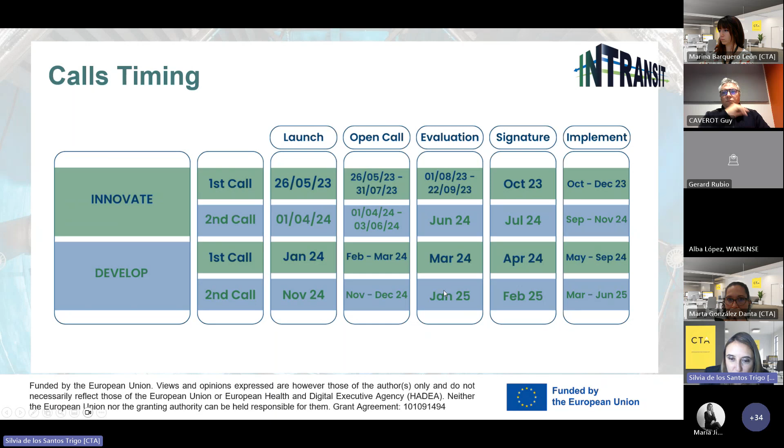The winners will be able to implement them between March and June of next year. That is only for you to have in mind if you are thinking of preparing some proposals.

This is the overall information about what we have done in this project. We are going to distribute more than 3 million euros between the SMEs in Europe of these 4 sectors through the Innovate services and through the Develop project. We expect to have at least 160 beneficiaries between the 2 bonuses, and more than 200 between the incubations, workshops, webinars, and the final event that will be here.

The Innovate Call is an advisory service to support companies to be more effective in different topics. Of course, we're going to support you in new circular business and to improve your projects.

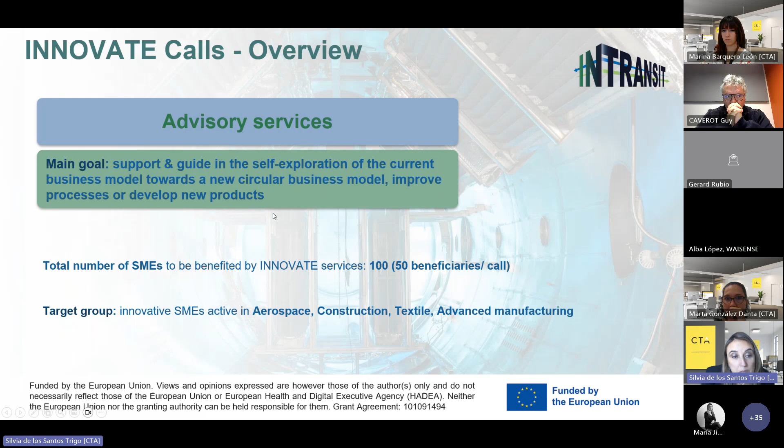The Innovate advantage that you will receive for being part of this bonus is, of course, the advisor for individual experts. You will be able to obtain the maximum benefit, the maximum impact of the Intransit project, because we will have a lot of visibility through Europe.

Of course, you will be part of the Intransit community, where you can find very good companies and potential collaborations in your innovations. And you will have a very direct benefit: if you are a beneficiary of Innovate, you will be able to obtain extra bonus in the evaluation of your future Develop proposal, and you will be able to be at the top of the ranking to be financed, because we have a lot of companies trying to receive this bonus, and there is strong competition to win.

For the second Innovate call, this is an overview of the Innovate call, only for you to know exactly the timing. We will have to finalize between September, October, and the beginning of November.

The Develop call is the mechanism that we have designed to provide you some funding to develop your innovations, to be able to develop new products, new prototypes, to make some market testing to facilitate the integration of your innovations in your business. As I said, we will be able to support projects in the lump sum financing way.

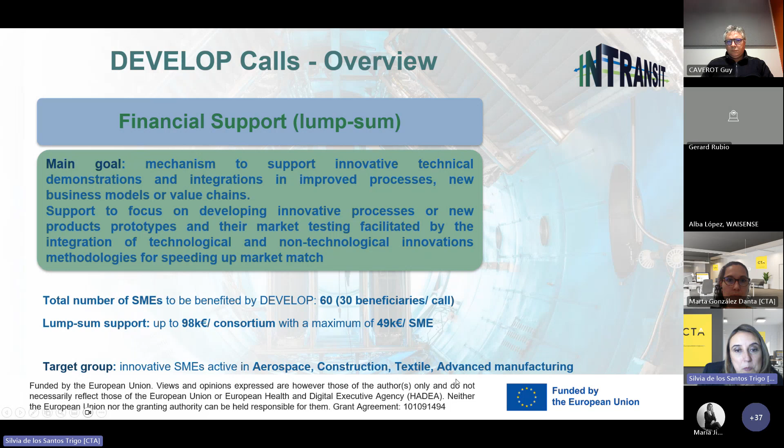The target group for this call are the SMEs in the aerospace, construction, textile, and advanced manufacturing sectors. And this is the timetable.

As I said, we expect to open in November. At mid-January, early January, we will finalize our call. The winners will be able to start implementing the project in March.

And that's all from my side. This is the presentation of the project, of the projects. I'm going to stop sharing the presentation.

I have to say that we are very happy to have here our partner, Instituto Jules Verne, and Guy Caverot is going to present the tech development that they have, especially in Industry 5.0, which is the topic of this session. Guy, what do you want?

Hello, is it okay for the presentation? I just put my... Maybe, Guy, if you can put it full screen, it's much better. Is it okay? Full screen? Perfect, thank you.

Okay, so I am Guy Caverot. I am in charge of technology transfer at Research Institute Jules Verne in France, in the west of France. This research institute is dedicated to industry and manufacturing. In this presentation, I propose to give you a practical view of the Industry 5.0 project through the presentation of concrete examples.

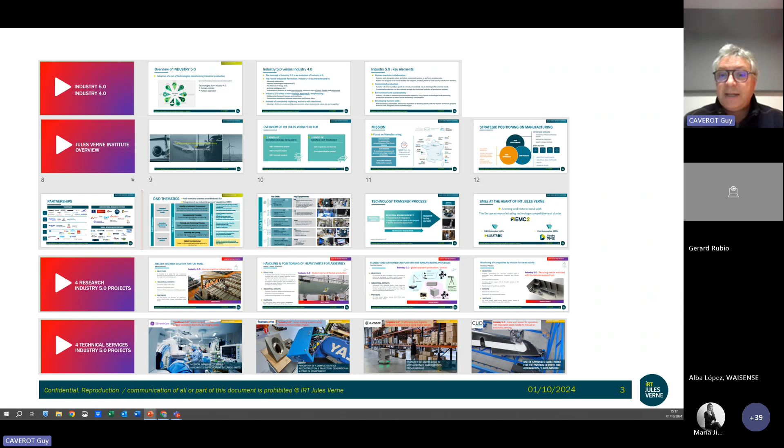I have divided this presentation into 4 parts. The first part, during 2 minutes, will briefly describe the concept of Industry 5.0. After that, I will describe our institute in a few minutes, and the next part will be the description of real industrial projects in different fields of application: shipbuilding, aeronautics, control, medical, and so on.

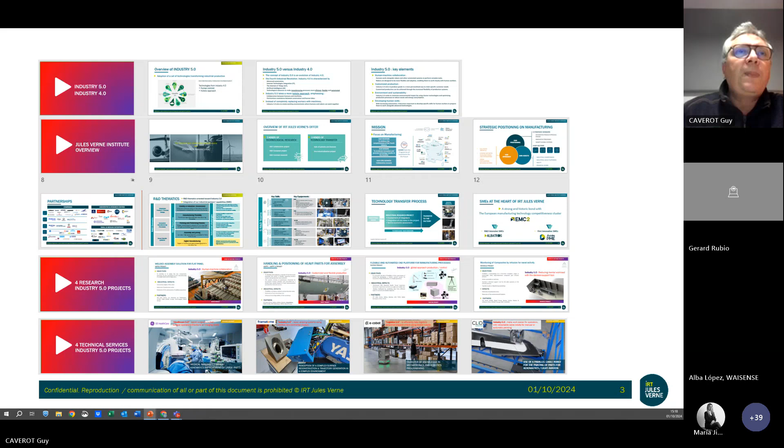So the first part is a brief description of the concept of Industry 5.0 and Industry 4.0. The concept of Industry 4.0 is a set of technologies to transform industrial production. In this Industry 4.0, we integrate different technologies, for example augmented reality, big data and analytics, and simulation, and so on.

And the origin of this description of the concept is a huge company. The name is Boston Consulting Group.

After this first Industry 4.0, with the main topics around manufacturing in order to be more efficient, flexible, and so on, the concept of Industry 5.0 is an evolution in which we try to have a more holistic approach in order to integrate the collaboration between humans and machines. We try to have a coexistence between automation and human labor, and we integrate in the project the different impacts: social impact, environmental impact, and economical impact too.

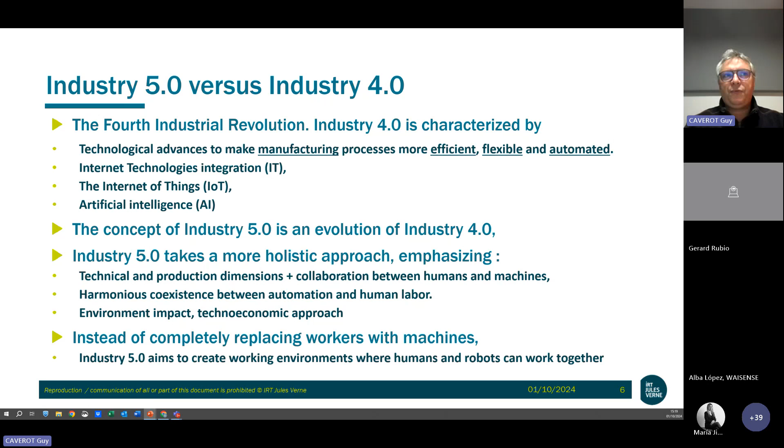So in this kind of industry, as we'll see in these different examples, we have a global approach with human in the center of the project. And the key element around this concept of Industry 5.0 is human-machine collaboration.

We will see examples in robotics, customized production in order to have a more personalized way to meet specific customer needs, environmental and sustainability in the project, and we integrate in our institute the development of human skills in the project in order to enhance the skills and know-how of the different people involved in the project.

So the next parts of my presentation, during 4 minutes, will be a description of our institute in the field of Industry 5.0. The main activity of our institute is Industrial and Collaborative Research Center dedicated to manufacturing in aerospace, shipbuilding, energy, and so on.

We propose different projects, European and French collaborative projects. We propose different research services, and we propose transfer of technology in terms of sales of patents and a project in order to transfer the results of the project.

The main mission of this kind of research center in France is to accelerate innovation and promote technology transfer to the factories. And we are in a network. The name of this network is the French Institutes of Technology, in which there are Research Institutes and Energy Transition Institutes. The core business of these different institutes is collaborative research.

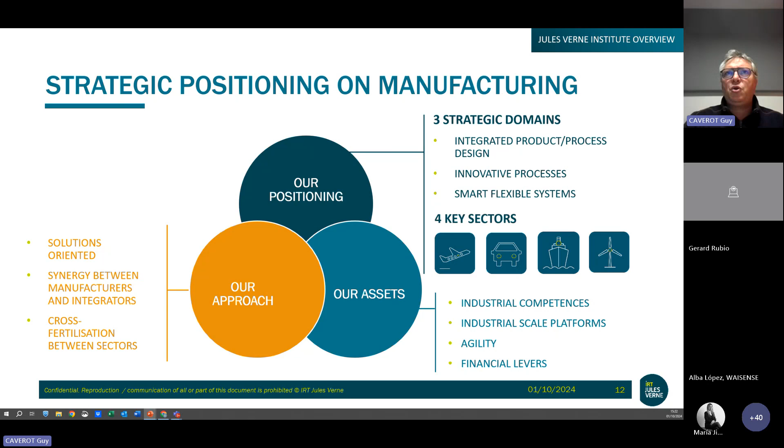And we are around 150 people in our institute now, with industrial competencies, industrial platforms, and capabilities of project management too. So you can see the different figures of our institute.

The average of activity is around 25-30 million euros of activities per year, and the perspective is around 40 million.

And in the field of Industry 5.0, we propose different R&D thematics around flexibility in manufacturing, in the process, in the field of assembly and joining of large parts, and in digital manufacturing.

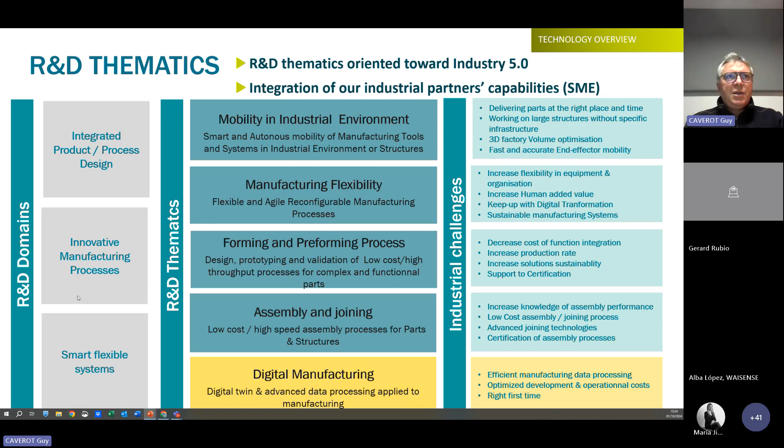And for each different thematic, we address real challenges in industry in order to enhance the quality and performance of products in industry. The three main R&D activities are integrated product and process design, innovative manufacturing processes, and flexible systems.

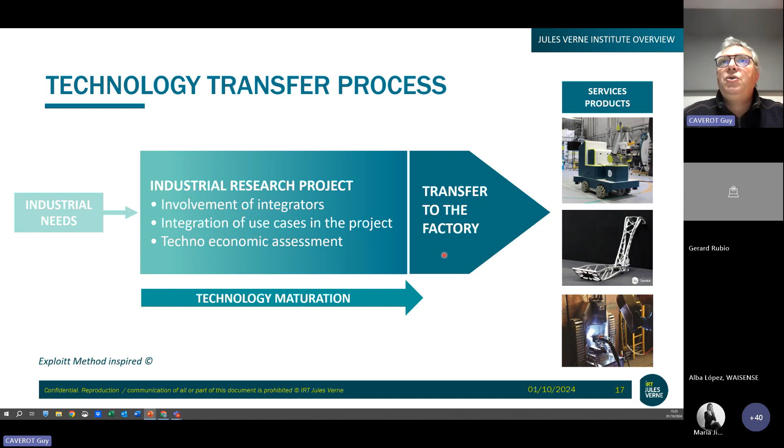So after this first view in 9 minutes of our activity and the concept of Industry 5.0, I will present during 10 minutes 8 different research projects, concrete research projects in the field of Industry 5.0.

The first project is ASPEN, a project in welding with mobile robots. You can see the mobile robots here. We propose this solution in partnership with end users, the first being Chantiers de l'Atlantique, a French shipbuilder, and another in the field of submarine, nuclear submarine production.

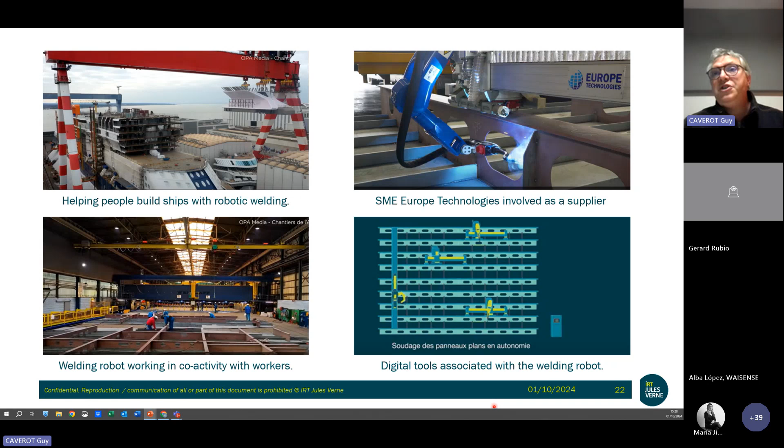You can see here the welding robots working in coactivity with the worker. There is real coactivity with the worker, and we need to supervise this activity. We used an IT model with digital tools associated with the welding robots.

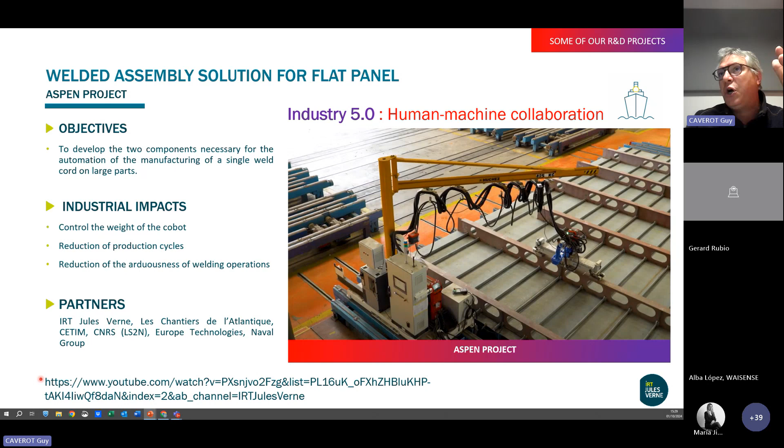This is the first example, and here there is the link to the video of the presentation of this project, showing the different activities of the end user and researchers of the institute in this project.

The second example is in the field of handling and positioning of heavy parts for assembly in aeronautics. The name of this project is HAPPY. In terms of specification of Industry 5.0, we propose a customized and flexible solution for the production of airplanes.

We are working on the development of a system of robots in order to enhance the quality of assembly of different parts of the plane. The system consists of robot positioners, which you can see here, mounted on automated guided vehicles. This system is controlled and in closed loop with a visual system in order to control the global system.

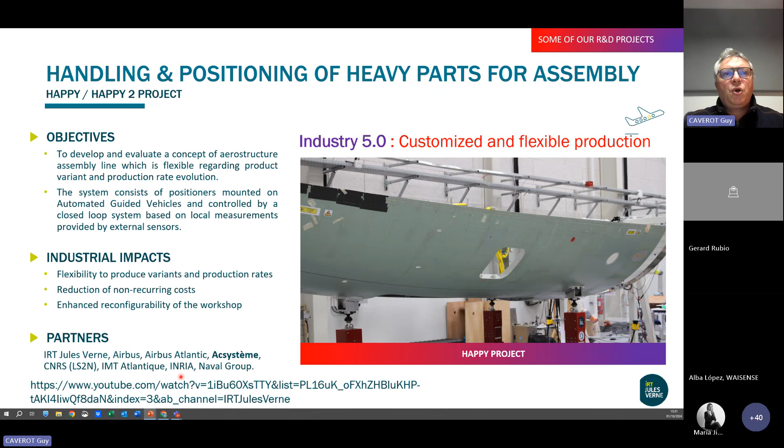The industrial impact of this project is mainly the flexible solution and the reduction of cost, with the reduction of the line production surface, and we try to enhance the reconfiguration of the workshop at Airbus. There are different partners in this project: Airbus company and Airbus Atlantic, a company in the field of automation, and different companies in research activity in visual survey.

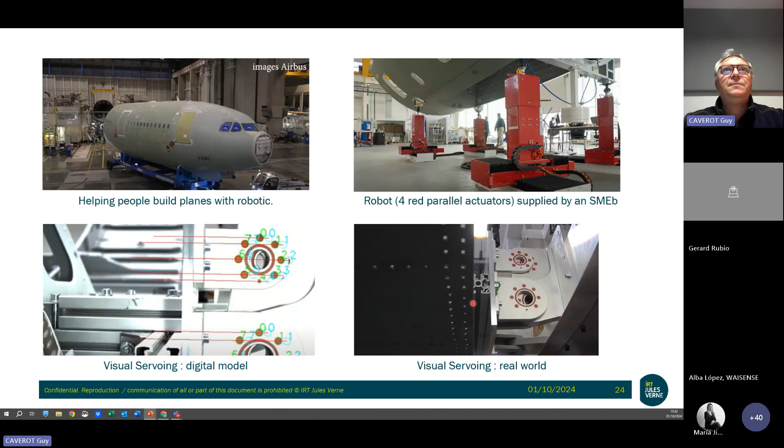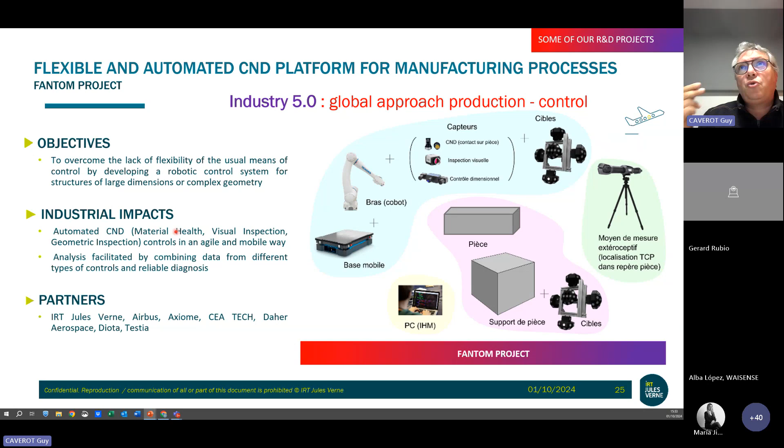The second part is the control. After that, we use a measurement system and supervision. In this kind of product, we integrate automated control of the quality of material. We can propose visual inspection or geometric inspection, and during production we propose an analysis of the different parameters in order to optimize the production. So this part is the control of the project.

And in the same time we have a project with the main topic being this one: in this project, we try to control composite infusion in naval activity.

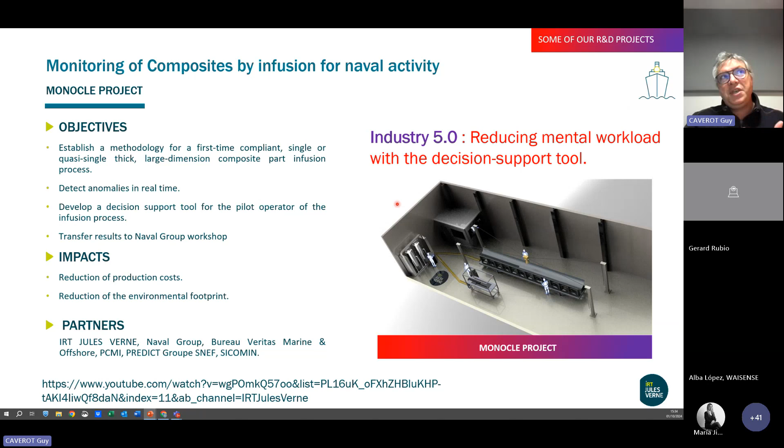We try to optimize the production and the cost of production, and the very important point in terms of human impact is that in this project we propose an interface in order to reduce the mental workload with tools of decision support. So this project is not only in the technical field of process optimization in composite, but we integrate another part in the field of human optimization activity in production.

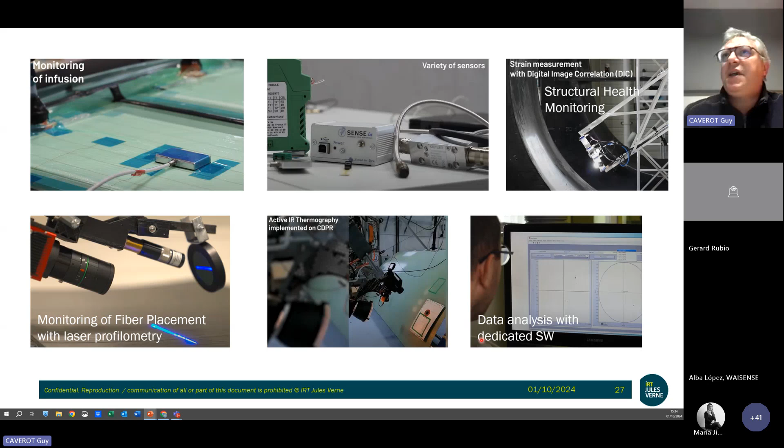And we propose different monitoring for this project. For example, for the infusion, we propose different sensors. You can see here the system with a laser measurement, and another system of measurement. We try to propose an interface in order to facilitate the work of the operator in these two projects.

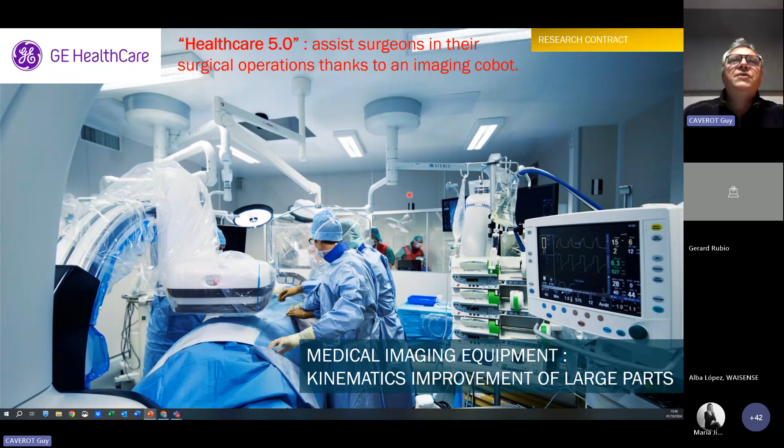The next project is in the nuclear application, a sort of industry application. In this project, we integrate environmental impact in order to repair the parts in a nuclear application system. In this kind of project, we integrate different technology.

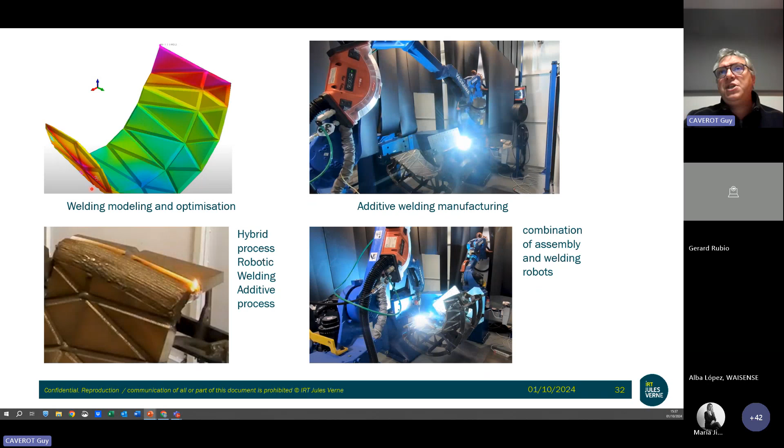For example, you can see a hybrid technology with welding technology here, with robotic welding, and in this part with 3D welding. We use different robot solutions, and we integrate modeling and optimization with an IT solution in this repair activity, with the company Framatome in France.

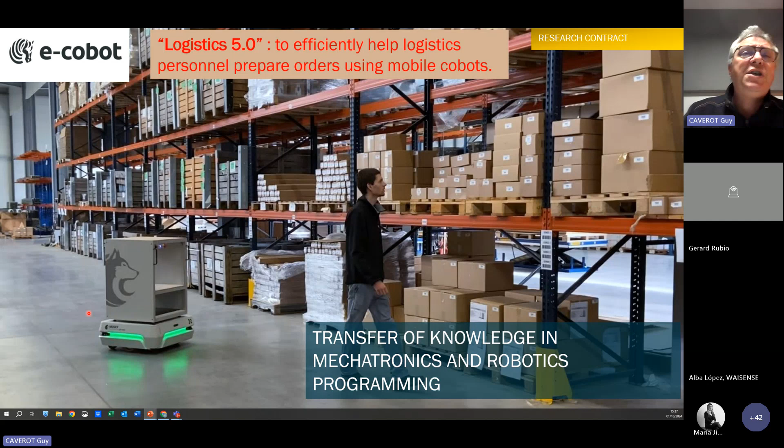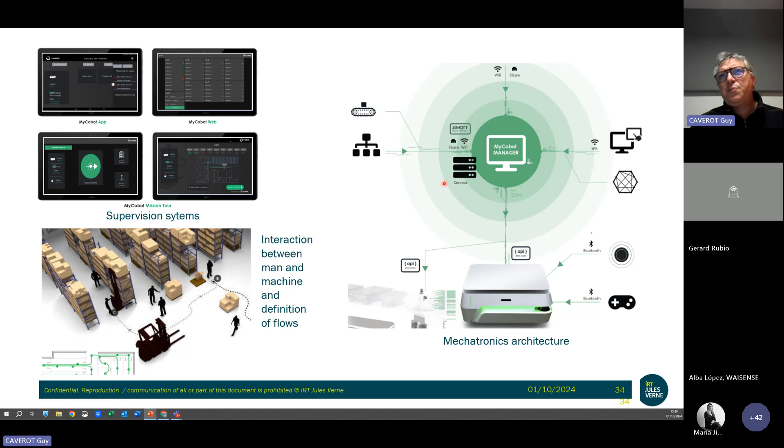The next project is in cobotics, in Logistics 5.0. In this logistics project, we try to propose a solution in which we integrate some knowledge in supervision, some simulation of people in interaction with machines, and we worked with these partners in the field of architecture of the system.

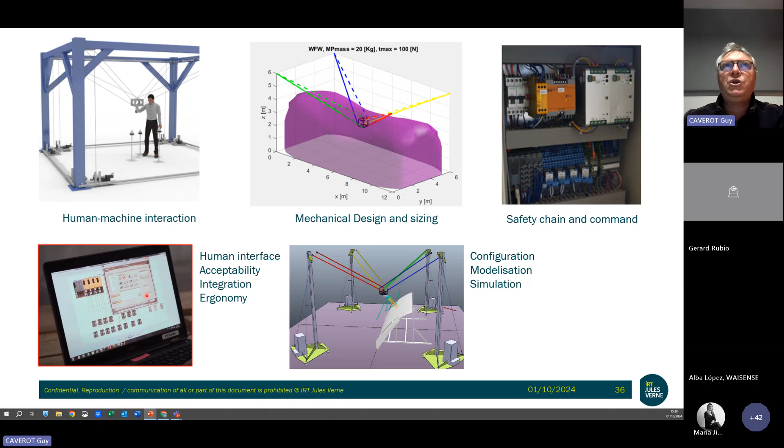The last example is in the field of cable robots for manual and automatic painting. In this project, with an integrator, the company SNEF and CLID Systemes, we integrate robots in an area where there are operators with a manual painting solution, and we integrate a mobile solution with robots using a parallel cable. We work on human interaction, simulation, and after that propose a solution with this kind of cable robot for this kind of painting application in aeronautics activity.

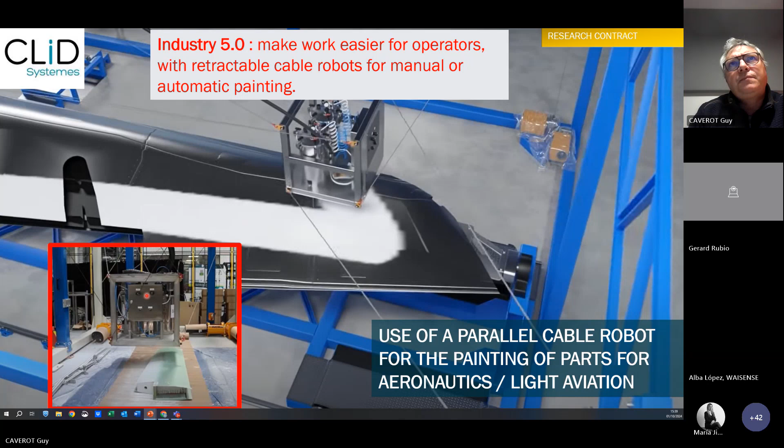So to conclude, in this presentation I presented industrial and R&D projects in advanced technology, metal and composite manufacturing, IT supervision, in different fields of application: aeronautics, shipbuilding, naval, logistics, energy, and so on.

I tried to show a global and human approach of Industry 5.0 with interaction between people and machines, for example with welding robots, in logistics, in surgery, describing flexibility of production in assembly activity, in painting with parallel robots, and describing improvement of technologies with an economical analysis, for example in nuclear and production applications.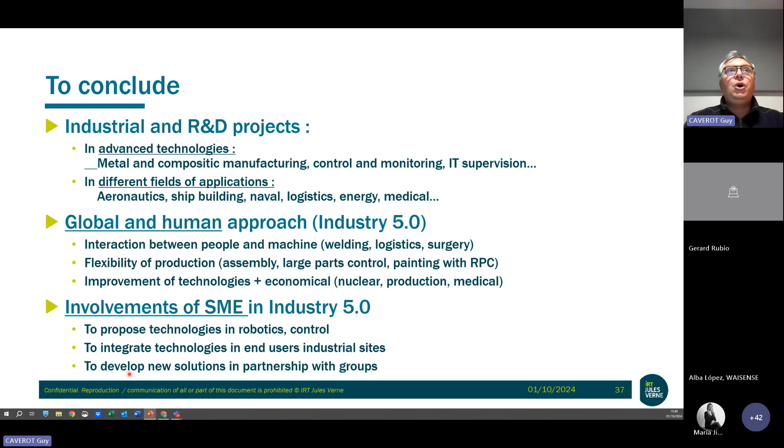The last point in this presentation is the fact that there are a lot of small and medium enterprises involved in these projects, in order to propose technology in robotics, for example with Euro Technology, and to integrate end users and industrial sites with this technology. In our institute, we develop new solutions in partnership with groups, with the involvement of these SMEs, to produce a solution and bring it to the market.

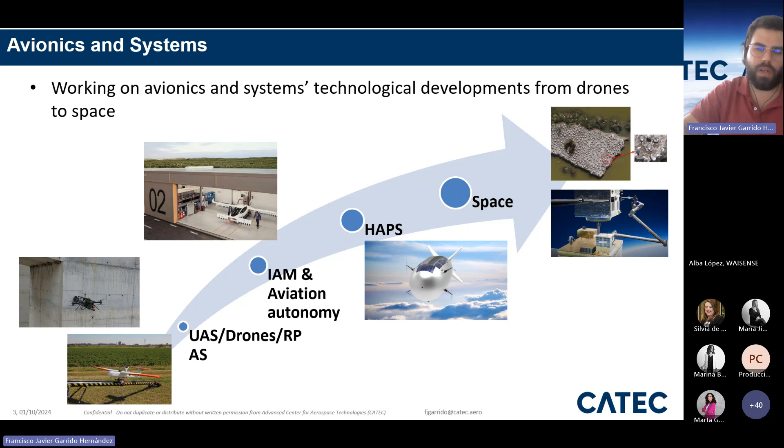Regarding avionics and systems, my department, what do we do? We work with all the avionics and systems regarding aeronautics that you can imagine. So we fly and we design and develop aircraft, UAS, drones and RPAS, and into space, and through innovative air mobility, and also aviation autonomy, and also with high altitude pseudo satellite aircraft, these aircraft that are expected to fly in the stratosphere, in the middle way between an aircraft and a satellite.

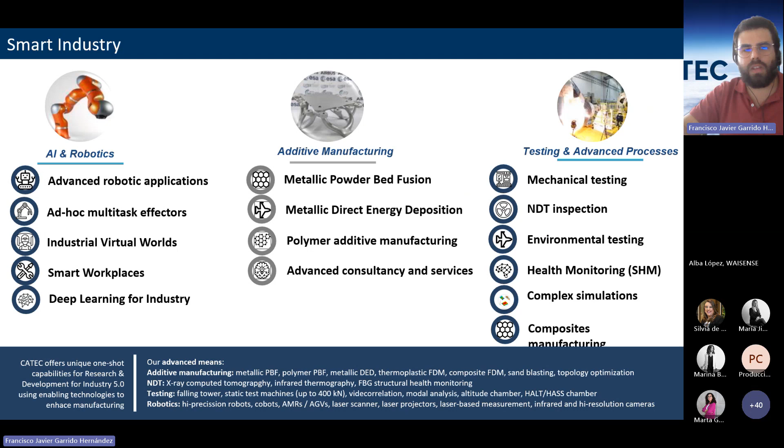Then regarding the Smart Industry department, it is not my unit, but just to present it, they have 3 different units: the artificial intelligence and robotics unit, additive manufacturing, and testing and advanced processes unit.

And finally the new Energy department, as I said we have already opened, will be focusing on hybrid energy platforms with hydrogen fuel cells, batteries and ultracapacitors together with advanced semiconductors, optimal power supply through artificial intelligence, and advanced testing of power supply units.

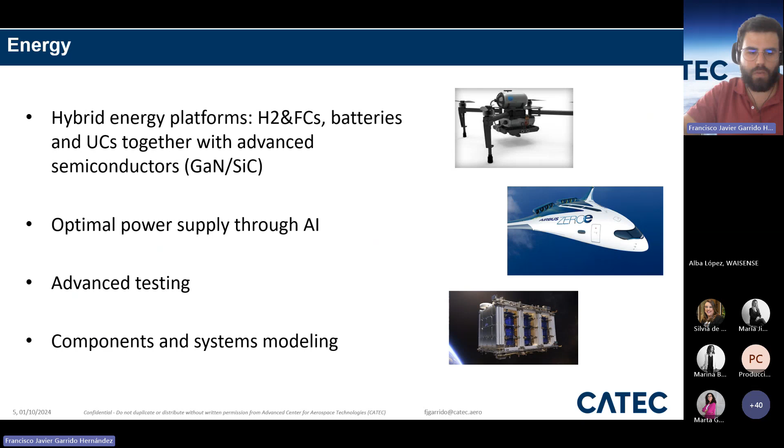What are my intentions with this presentation? I want to present to you, as my colleague did before, 3 different projects regarding avionics and system units, so UAVs, drones, and how we apply these drones to the construction, inspection, and maintenance sector.

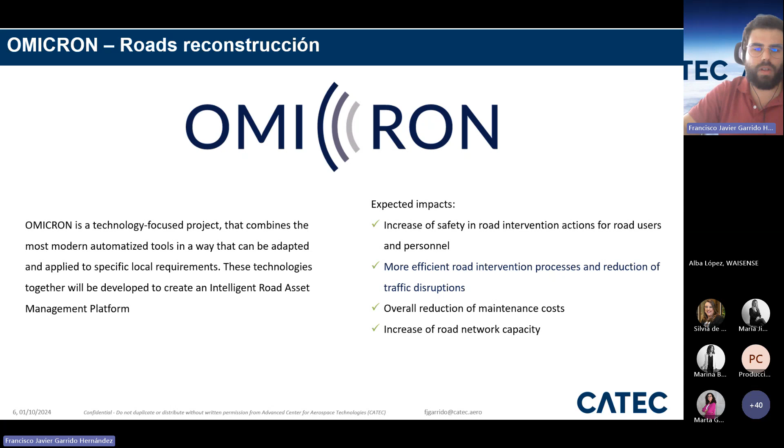The first project is Omicron, which you can see in this slide. It is a technology-focused project that combines the most modern automatized tools in a way that can be adapted and applied to a specific local requirement. With this combination of technologies we want to develop and create an intelligent road asset management platform. The expected impact of this project, which is already finished - the final demo was just 2 weeks ago - is to increase safety in road intervention actions for road users and personnel, to have more efficient road intervention processes and reduction of traffic disruptions, an overall reduction of maintenance costs, and also increase the road network capacity.

So what did we do in this project? As I said, our core work is in UAVs, avionics and systems. So we built a platform for long-range inspection of roads, and we did a reconstruction of photogrammetry-based 3D maps of the roads in order to detect all the assets around the road, and also to detect defects and increase the efficiency of the road inspection. We did all of that with an onboard vision-based threat detection system.

Here in the video you can see a first validation scenario that we did in our facilities here in Sevilla. The final validation was at our test center in Jaén, at Atlas Bravo. We flew a distance of 1,200 meters with an altitude of 35 meters and a lateral separation with the runway of 40 meters.

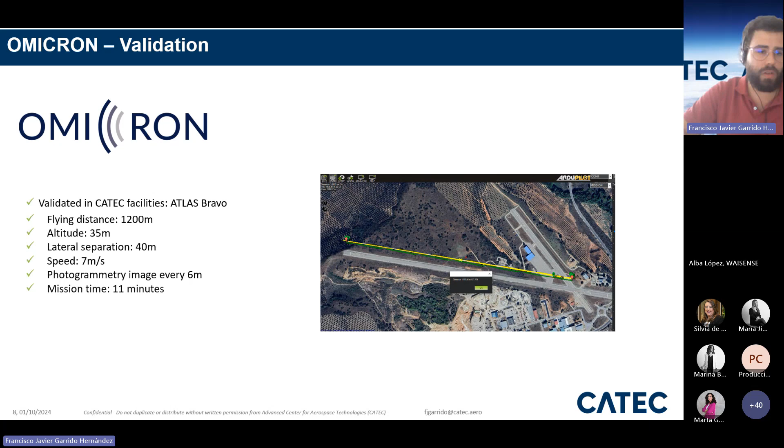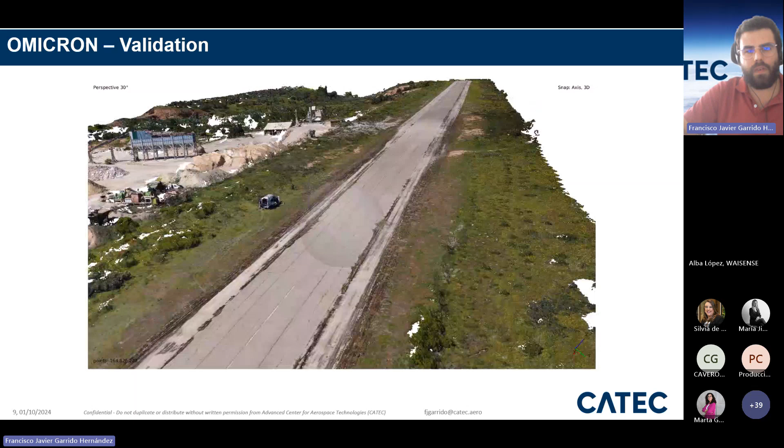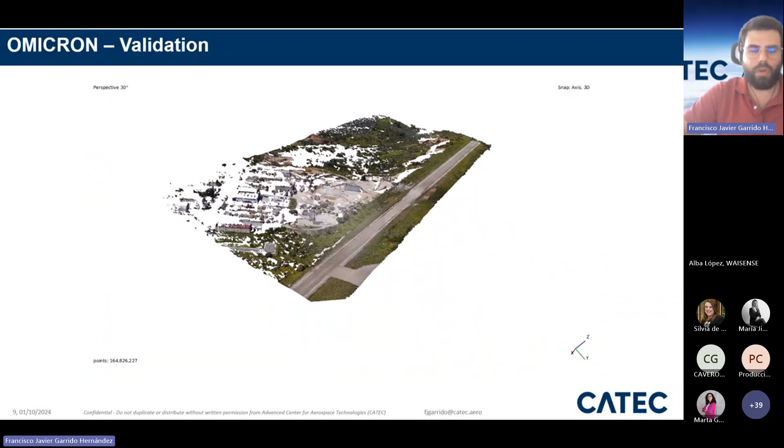We flew the aircraft at a speed of 7 meters per second, and the photogrammetry images were taken every 6 meters. With that, here you can see the result of the reconstruction of the road, of the runway, and you can see the detail that we could have with these parameters and with this onboard vision system that we developed for the project. You can see the detail, and we were able to even detect some defects on the road with that.

The next project that I'm going to present is Beyonders. Beyonders project aims to improve efficiency, safety, and quality in the construction sector while reducing the environmental impact of building sites.

So what are the project contributions to these objectives? We are trying to have a successful integration of pioneering technologies, and regarding CATEC, this pioneer technology will be the autonomous vehicle and human-robot collaboration. We are going to demonstrate the impact of the use of these new technologies on the efficiency of resources, the reduction of waste and embodied CO2 emissions, and finally the demonstration of the safety of the new technology in a construction environment.

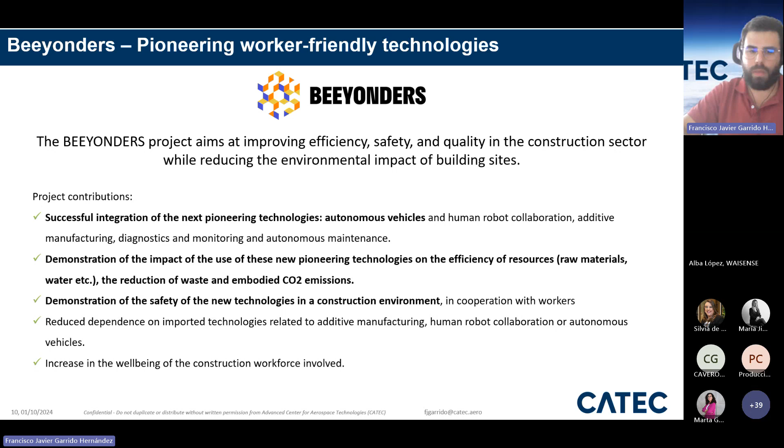In that sense, we are adapting our LiDAR inertial odometry localization for a tunnel use case. Here in the video, you can see how we have already tested our UAV flying into an indoor facility, a tunnel. We have developed a GNSS-free localization system based on LiDAR and inertial capabilities, and fusing all this data, we are able to locate our UAV into the tunnel and inspect with visual cameras all the assets.

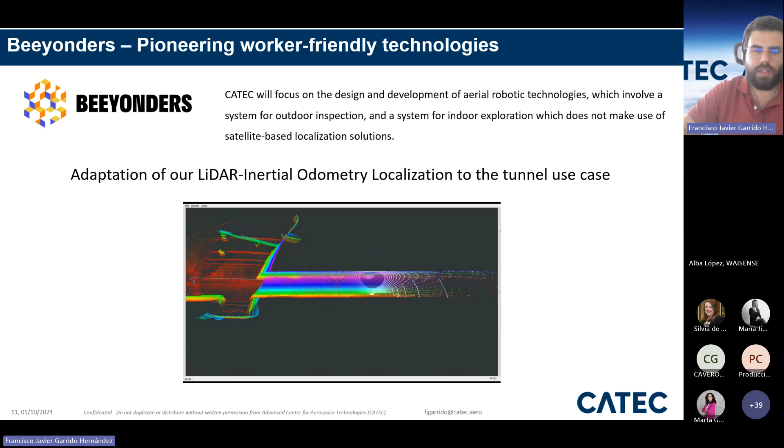Here is a real flight, and in the next slide I'm going to show you a simulation improving not only the localization but also the path planning and trajectory to navigate through the tunnel in the best way.

Here you can see how we have developed an autonomous exploration algorithm based on graph-based algorithms, and how the UAV is exploring the unknown environment and reconstructing the tunnel and all the assets, to be able to afterwards come back and analyze all the possible defects that we have. So that is all regarding Beeyonders.

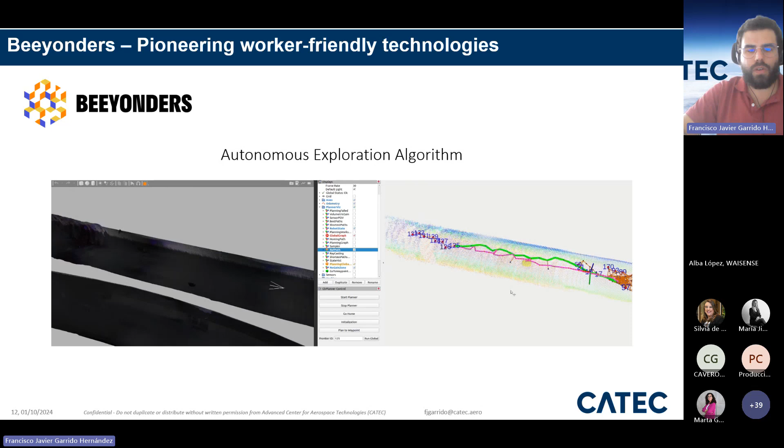Finally, one of our proudest projects, I could say, the one that I want to present in depth, is Piloting. Piloting project has been a 4-year project coordinated by us, by CATEC. It was a Horizon 2020 project, and you can see all the partners that we had involved in the project. Here in Piloting, we had 3 different use cases.

It was focused on the inspection and maintenance sector, and we wanted to inspect and maintain refineries, viaducts, and tunnels. At CATEC, we developed technologies for the use cases of refineries and viaducts, as you will see. For refineries, we did NDT inspection and maintenance procedures, and for the viaduct, we developed a visual inspection UAV.

Apart from that, another added value of CATEC, as part of the coordination of the project, was the development of a general robot control station, because Piloting was not only based on UAVs but also UGVs, ground vehicles. So we developed a ground control station in which an operator could control all types of vehicles, not only UAVs but also UGVs.

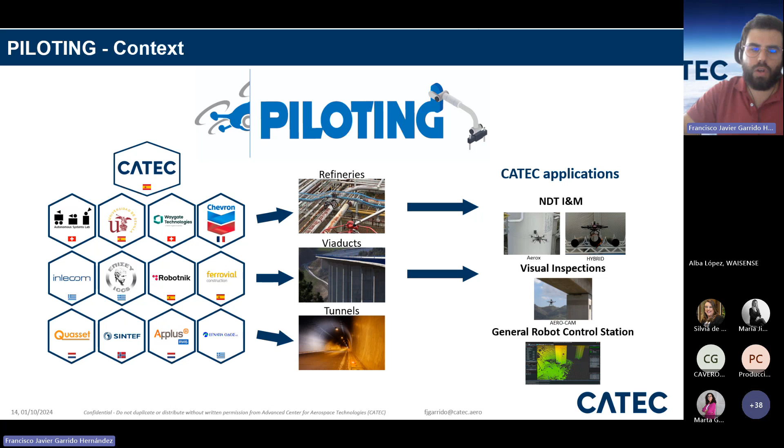So, the first robot, the first UAV that I'm going to show you is the AERO-CAM. As I said, it is for visual inspections. This UAV is an automated visual infrastructure inspection system.

It navigates with a robust GNSS-free localization system. As you can imagine, below a viaduct we lost all GNSS signals, so we have to reference the system with a global referencing system to a permanent 3D map. So before flying to the viaduct, we had to take the full 3D map of the viaduct, and then with the robust GNSS-free localization system, we were able to locate the UAV all over the viaducts.

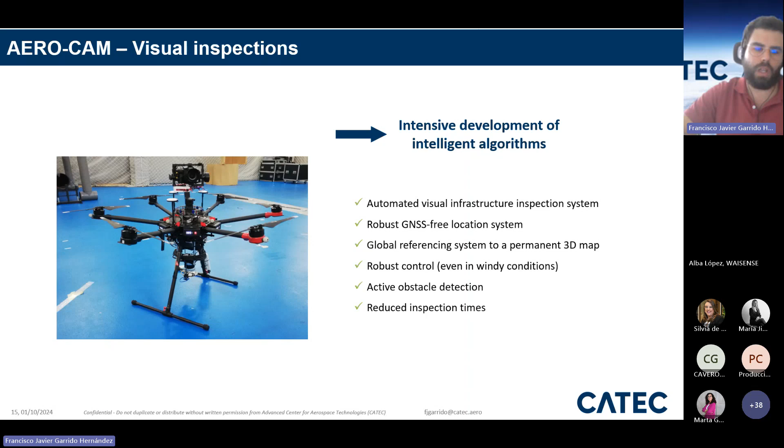We have also developed a robust control with our autopilot and with active obstacle detection to increase the robustness and safety of the operation. Here you can see the AERO-CAM flying.

It was a fully autonomous inspection, as I said, with a high-precision GNSS-free navigation system, and during the whole flight the active obstacle detection system was activated. With all the combination of this, we were able to repeat the inspection throughout the entire year.

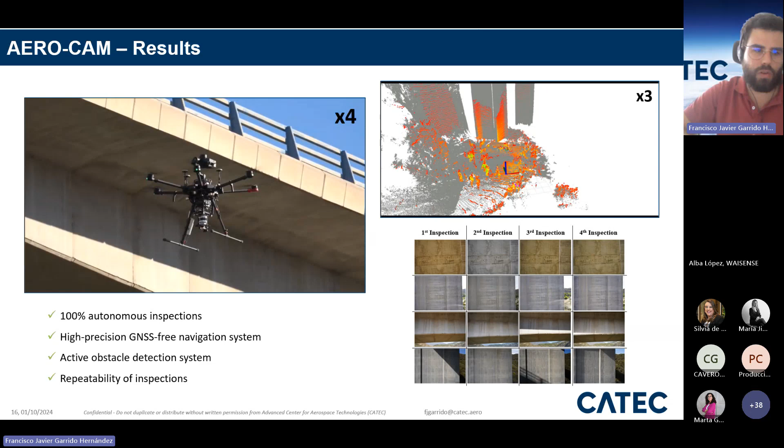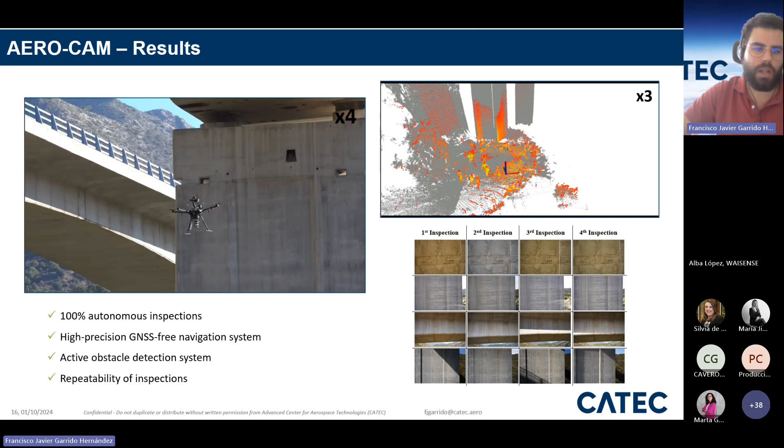So here in the video, you can see the operation of the AERO-CAM, but on the right-hand side below, you can see 4 different inspections of 4 different points of the viaducts on 4 different days of the year. You can see how the shadows and the sun, the light, is changing, but the UAV is able to come back to the same location and inspect the same assets during a year.

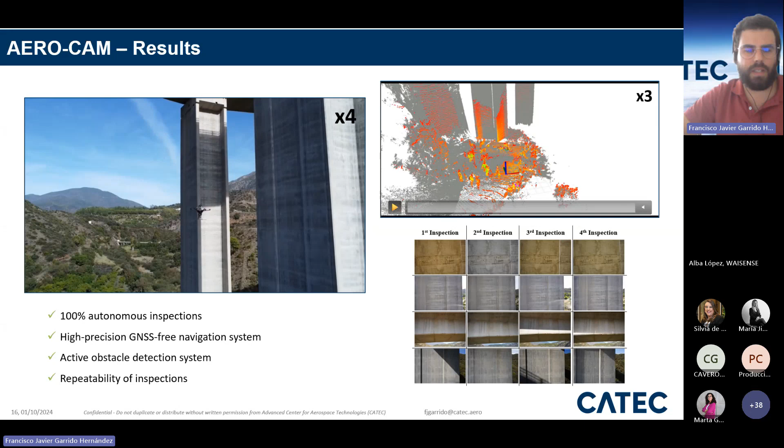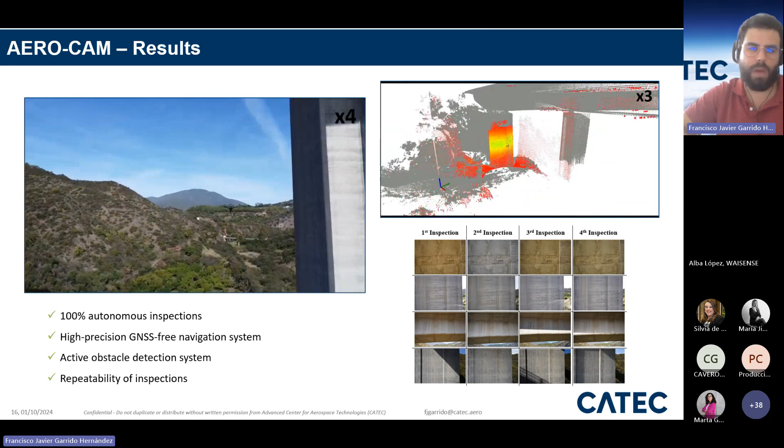Here you can also see the localization system, how it works with a LiDAR. So the UAV is flying and matching its position with the 3D map that was already taken for the viaduct.

The next UAV that we developed in piloting was the hybrid. It was devoted to the inspection of non-insulated pipes. The inspection on the pipe was performed by a crawler, so the crawler was on board the UAV.

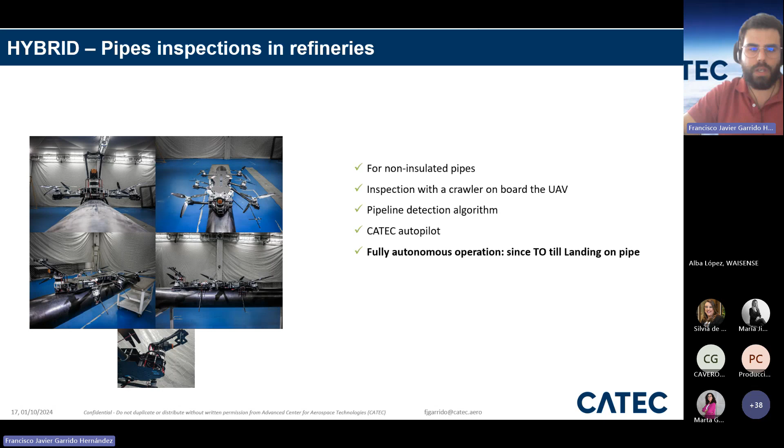The UAV went to the pipe, landed, and deployed the crawler to make the inspection. The detection of the pipeline was fully autonomous, developed with the CATEC autopilot. Here you can see the aerocam, the hybrid, in operation.

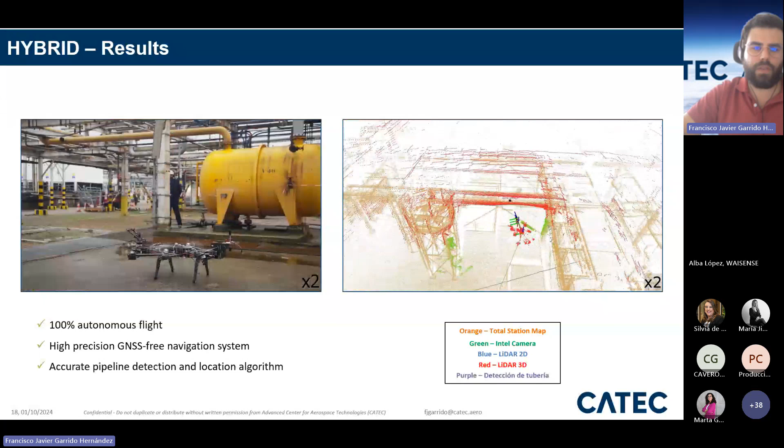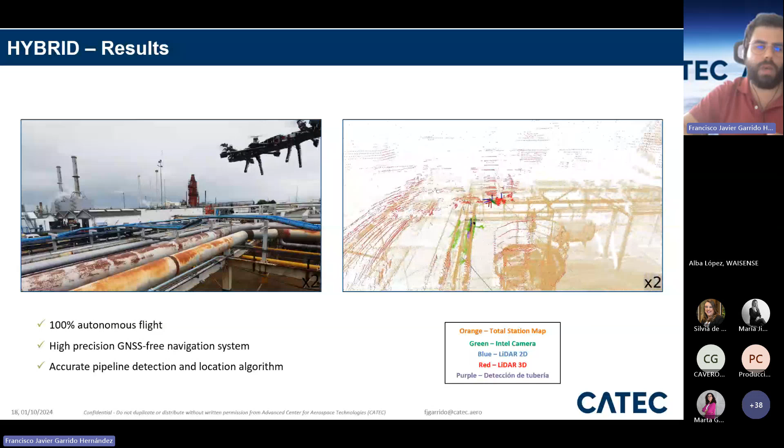On the left-hand side, a video of the real operation. On the right-hand side, a video of the localization system based on a data fusion system where we fused the vision cameras, total station map, and two LiDARs, one 2D and one 3D.

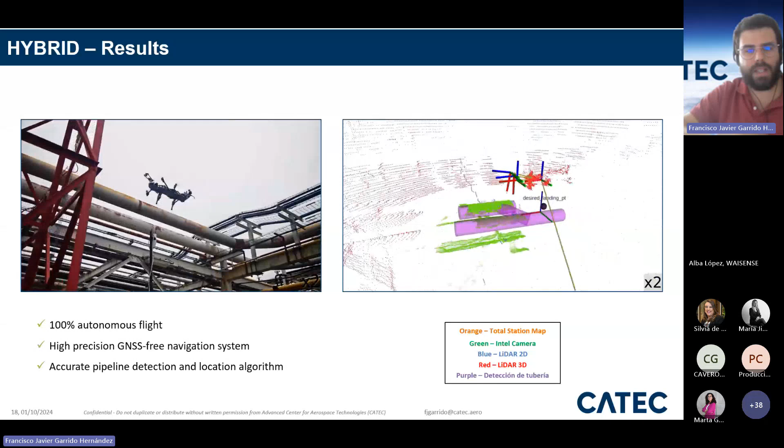With that, we were able to look. You can see now in purple how we were able to detect the pipe, so the operator can select in which pipe we want to land. Here you can see how the robot is autonomously landing on the pipe, and then it will deploy the crawler and make all the inspection.

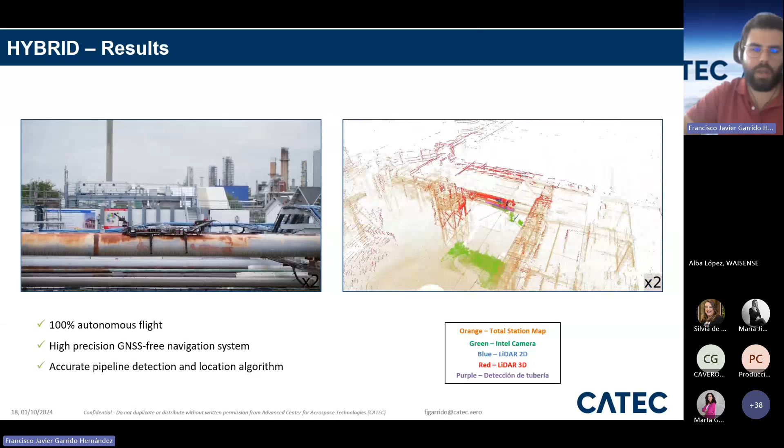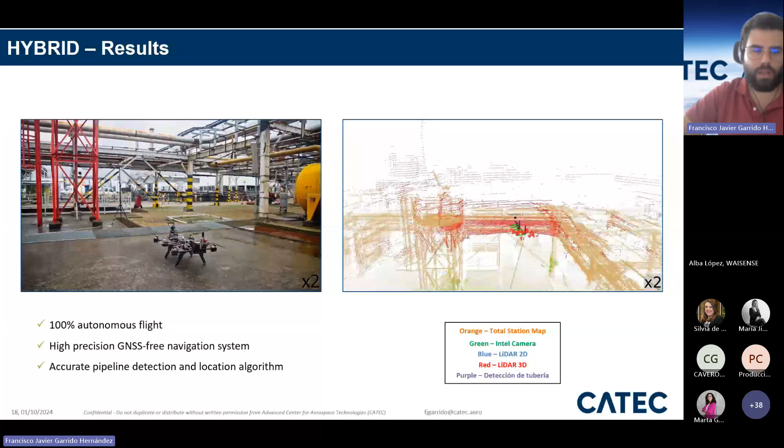Then the UAV will take off from the pipe again autonomously and land in the takeoff and landing spot. Also, it was a GNSS-free navigation system.

Finally, one of the developments we are most proud of at CATEC is the AeroX. It is devoted to NDT inspections.

It is a robot in which we have an effector where we integrate the sensor - UT sensor, PEC, eddy current, whatever sensor we need for the inspection - and we are able to touch the surface of the asset. It doesn't matter if it is flat or a curved surface; we are able to perform the inspection and take all the measurements.

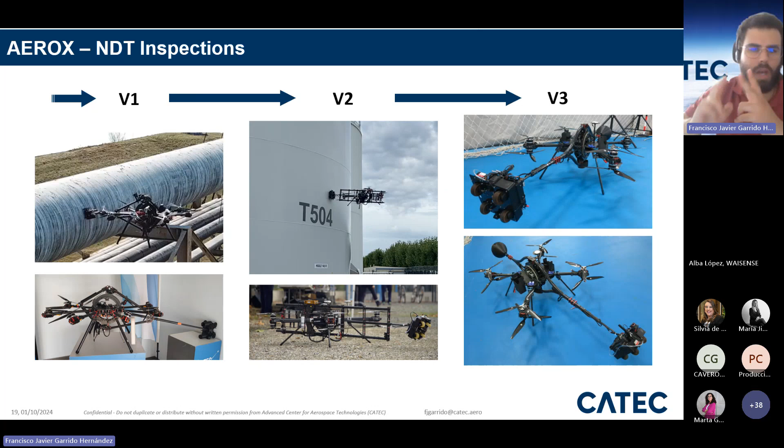Here you can see the evolution of the concept since the very beginning, with the first version until the last one we developed in PILOTING. It is more robust, not only in the frame and hardware, but also in the avionics, control, autopilot, and all the sensing integrated in the aircraft.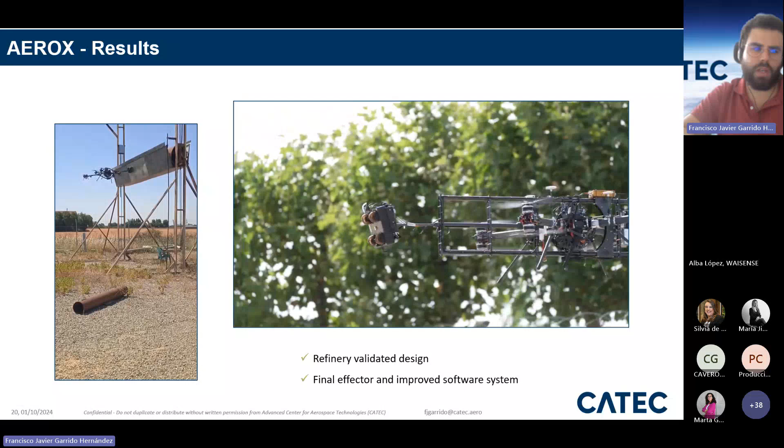Here you can see the Aerox in a real environment. On the left-hand side, the testing of the third version in our facility, and in the big video I am showing the second version in a real refinery spot in the north of France.

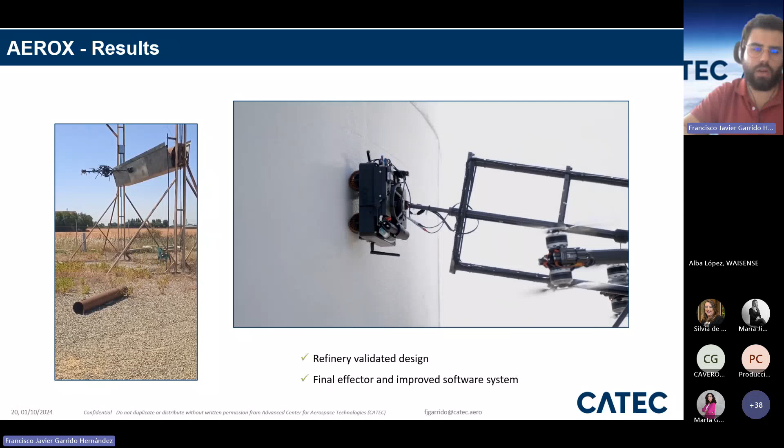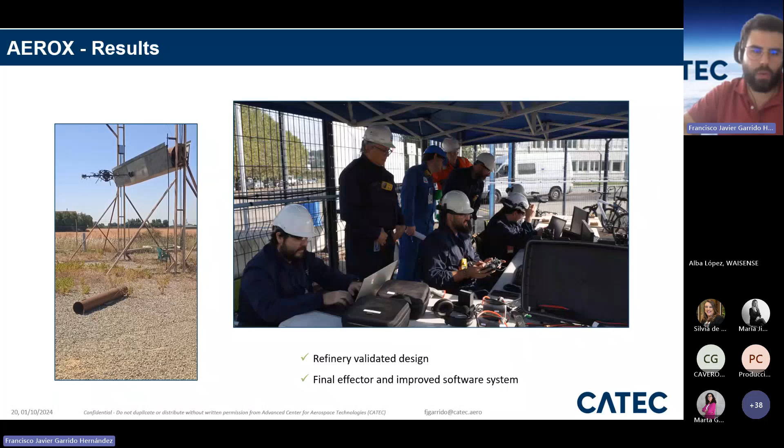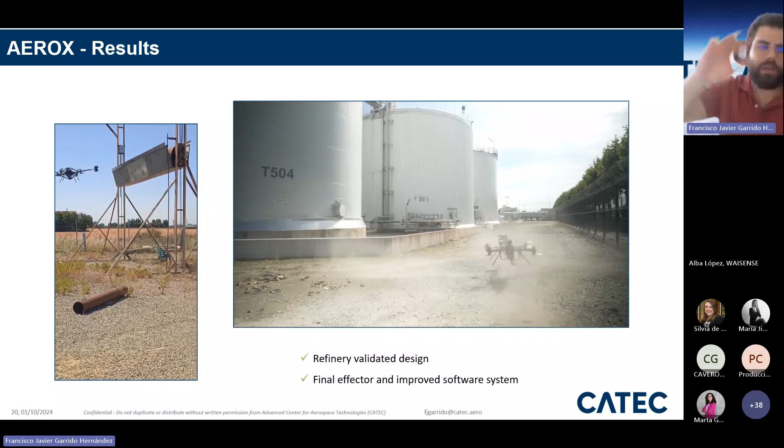I can say that all the operation is fully autonomous. The pilot is there only for safety and because of regulation, but all the operation is fully autonomous. Once the Aerox touches the surface, the operator on ground can pilot the crawler, the end effector, and navigate through the surface to take the measurements needed for the inspection.

Finally, as I said, we also designed a general robot control station. Here is just an example - I wanted to show the Aerox because you just saw it in operation.

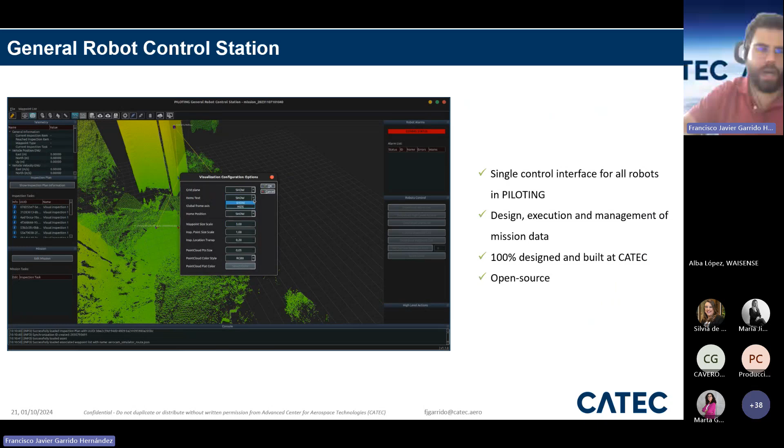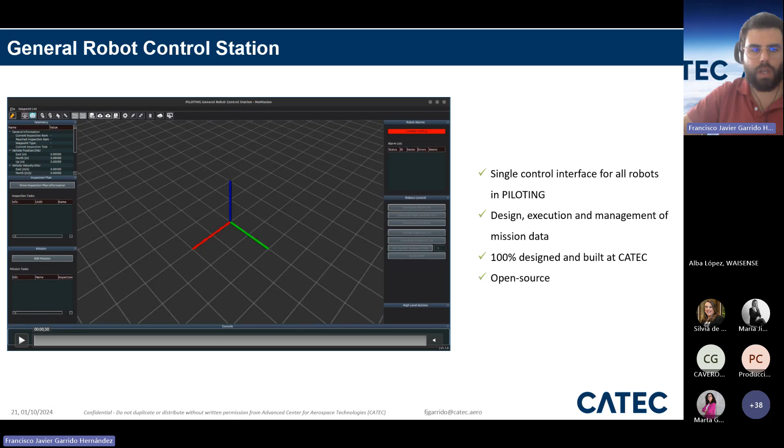We developed a friendly human interface to control all the robots, and also to plan all the inspections with inspection points or the data that needs to be captured. It was really nice work, and it is open source, available for everybody. If anyone has interest in this tool, just let me know and I can send you the reference to download everything.

Finally, it is not a project but a technology we are currently developing: swarming and teaming technologies that we have already deployed for some detection projects and surveillance. Now we are starting to make this development available for the construction sector, studying how to apply this swarming technology to perform visual and integrity inspections, all at the same time.

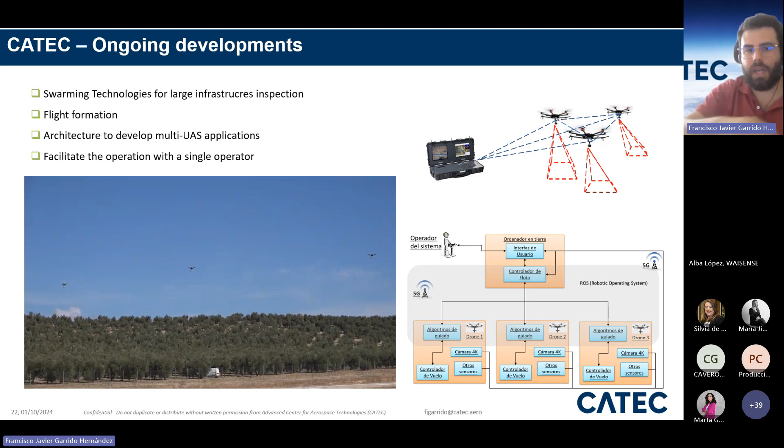With that, we can increase the efficiency of the operation because we will need only one single operator to operate all the swarming, as you can see here in the video we already did in the past for surveillance use cases. Now we are starting to think about and develop that for visual and integrity inspections.

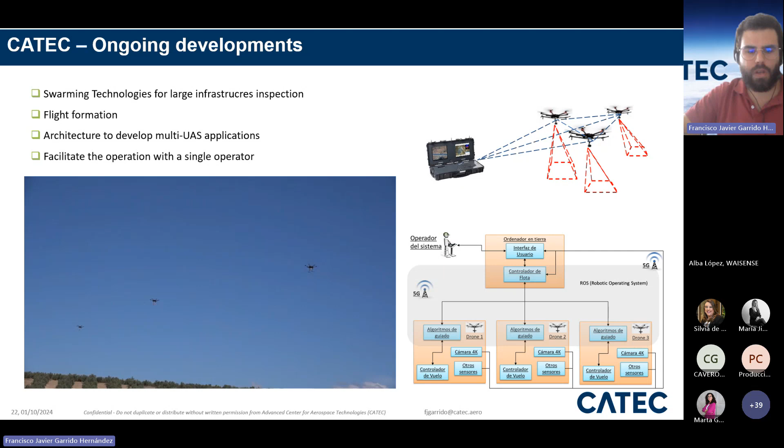I'm open to answer any kind of question.

Thank you very much, Javier, for your presentation. Very interesting. One of the developments you presented was the Innovation Prize of the European Commission. That is true - the Aerox was the first version.

To finalize this presentation, I need to show you some snapshots about the METASTARS project, which is also relevant here, to show some results that could be useful for SMEs in the future. I'll take only 5 minutes, and at the end maybe some questions can be presented to the audience.

I'm going to share with you the presentation on Industry 5.0 regarding METASTARS - just a quick snapshot to let you know the results we have had and what we have done. We have been supporting the METASTARS project.

Its objective was to deploy new processes and technology in the sector to be more resilient, to strengthen the aerospace and defense ecosystem, and to provide skills to the aerospace and defense key players in Europe.

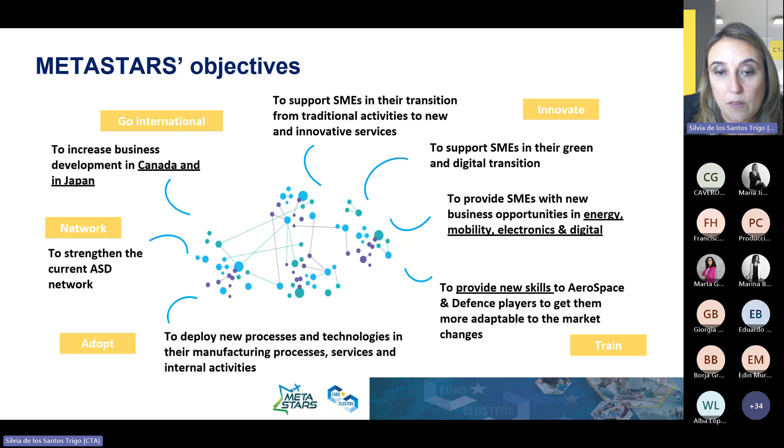Due to this, we have carried out different trainings with the various European clusters we have in Europe, taking into account different soft skills, with a very high level of resources. This training has been disseminated - I don't know if it's published, but if any company is interested, they can ask us and we will show them some snapshots.

We have also prepared a very interesting map in Power BI where you can detect key actors at the European level - important stakeholders such as digital innovation hubs and other stakeholders that can support the aerospace sector. You can check it and find out who can support you in your region.

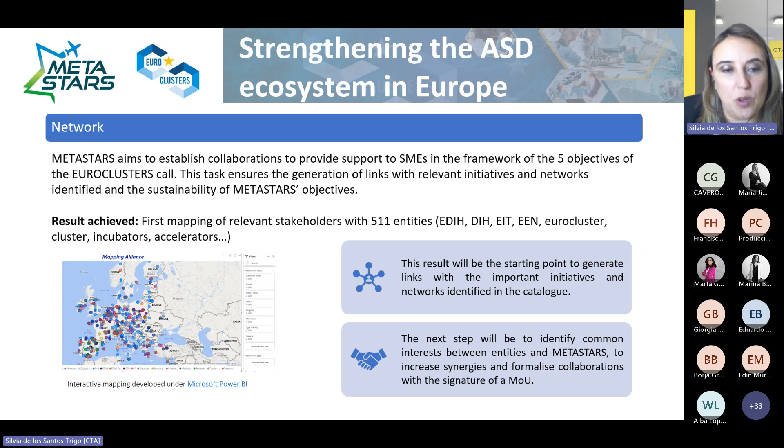That's another interesting result we obtained in METASTARS. One important issue was the direct support to companies - we had 35 applications for projects, and we were able to finance some of them at the end.

I think at the end - sorry, I didn't bring the global figures, but we gave them 2 million euros that were requested, and we supported them throughout Europe.

And that's all from my side.

And now it's the turn for questions. I don't know if there were a lot of questions from the assistants - we have only 2 or 3 minutes.

Javier, Guy, there is a question that is quite interesting. One of the speakers asked: what is the difference, what makes our projects different between Industry 5.0 and Industry 4.0? Maybe Javier, Guy, can you open your cameras?